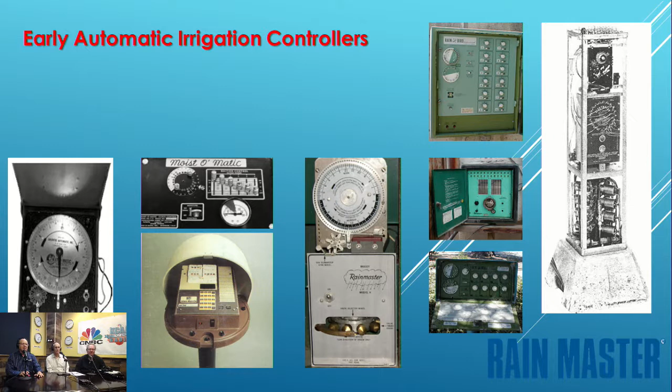Irrigation controllers have also come a long way. For those of you watching, here's a snapshot of some old irrigation controllers. Some of them I can tell you what they are and what they did, and there might be one or two that are even before my time. But most of them were, back in the day, hydraulic, electromechanical, very inefficient and difficult to program and use.

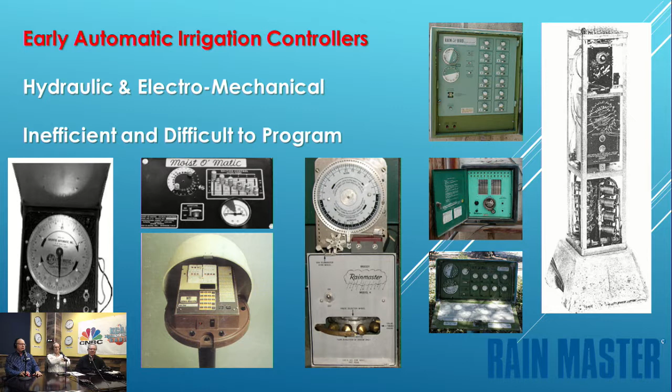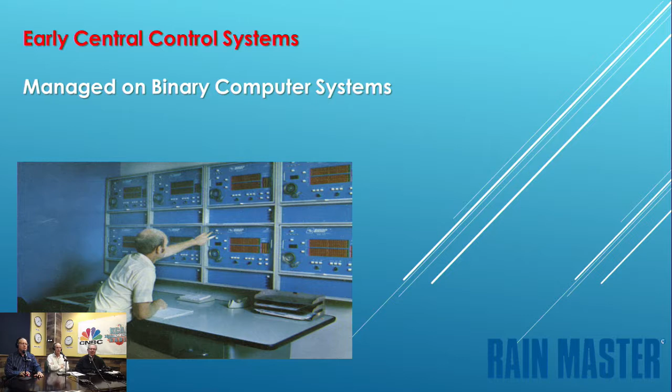Big dials. Early central control systems moved into a computer environment managed on binary computer systems, very large, difficult to manage. Looks like a Sperry Univac computer. Yeah, it's an oldie for sure.

Punch cards? I think that was managing a golf course. I couldn't tell you which one, but it managed a golf course. Do you have a circa date for that photograph? Unfortunately, I don't at the moment. Judging by the haircut and the clothes, I probably do in my notes in preparation for this, but I didn't commit that to memory.

Looks like the 70s. Now, here's another great one for you: bulky, expensive mainframe computers. So we've come a long way.

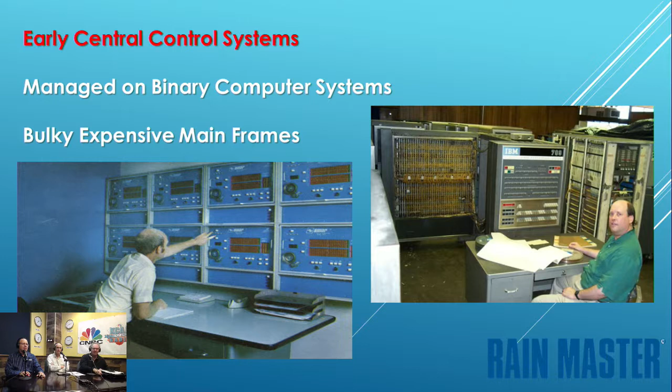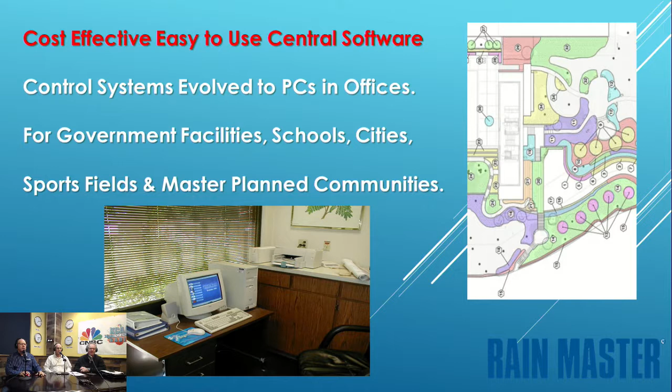As we advanced in the central control system, so did the software. Central controls evolved to be on PCs, for government facilities, school districts, and cities. PCs moved into offices and didn't look bulky and expensive like those other pictures we saw. They were used for sports fields and master planned communities, and became more widespread, readily available, and more cost-effective throughout.

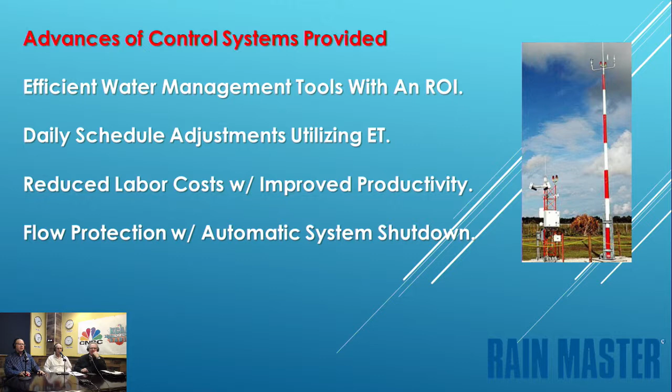Advances in the controllers themselves provided efficient water management tools with a calculable ROI, through daily schedule adjustments utilizing ET, reduced labor costs with improved productivity, flow protection and automatic system shutdown, automatic and remote shutdown for rain, freeze, and wind, along with accurate record keeping.

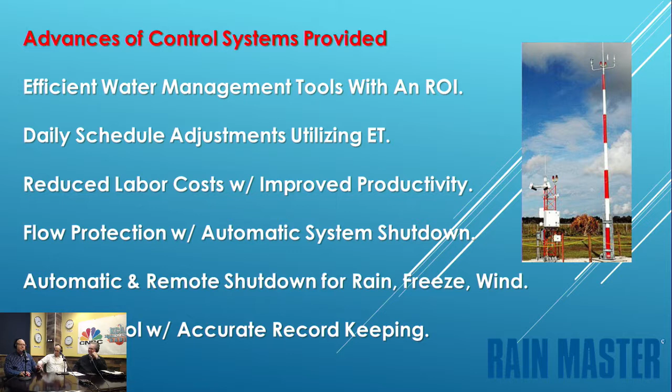These new systems provided modern graphic interfaces, which provided very powerful and total site management tools.

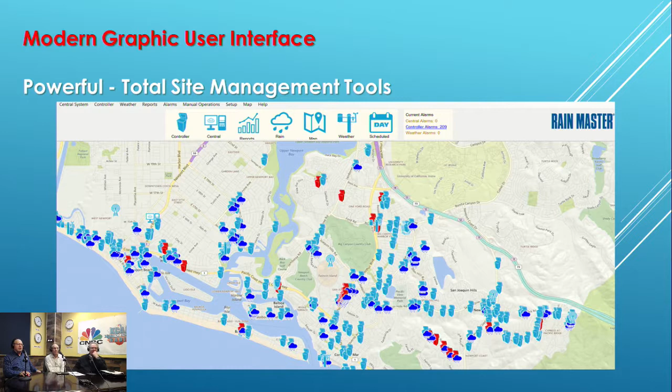I'm familiar with that part of town on that map right there. You recognize that map? Where was that from? That's Newport Harbor, yes, and Newport Back Bay, Beach. It's one of the customers very close to my heart in the city of Newport Beach.

Yep. So when this was started in the central control systems, what was the largest size? How many valves could they operate then versus what you see today? Well, that first picture we saw was a golf course, so that was probably a typical system back in the day. Now we have systems that range from 1 or 2 controllers to hundreds and hundreds of controllers.

And how many valves would they operate? As we move forward, advanced control systems can typically range between 8 to 200 zones or stations. But what provided an actual ROI for these systems to become widespread was ET-based scheduling, or weather-based scheduling.

So when we talk about ET, we talk about evapotranspiration. The evaporation and transpiration. The sum of transpiration plus evaporation from the land surface is how we calculate ET, and it's measured over a period of time, typically in inches. For those involved in daily schedule adjustments, we're looking at that ET value daily. Evaporation is the loss of water off of the surface, and transpiration is the loss of moisture through the plant material, the water that the plant used or transpired.

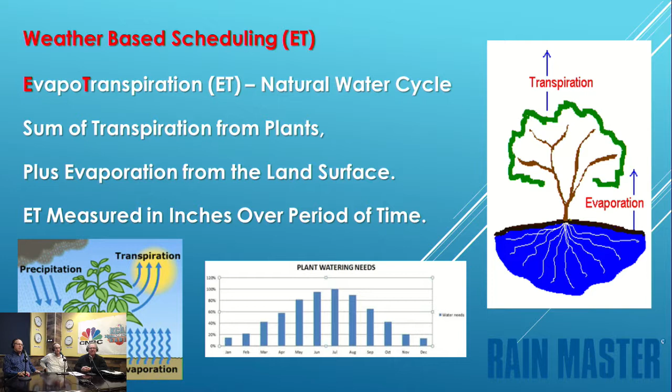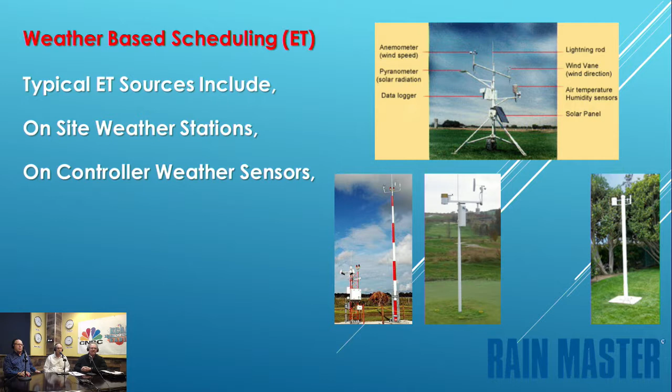So now that we have an idea of what ET is, we're going to talk about where we get that data. The typical ET sources include on-site weather stations, and there's a variety of weather stations that provide that data to us, as well as on-controller weather sensors, and internet or web weather, which is what we commonly use these days.

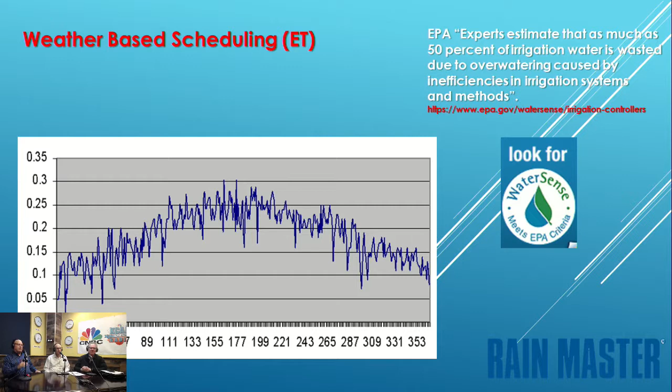So we know a little bit about what ET is and where we get it from, and I want to explain how we use it in our scheduling practices. One interesting note from the EPA's website says experts estimate that as much as 50% of irrigation water is wasted due to overwatering caused by inefficiencies in irrigation systems and methods. So what we try to do is utilize this ET information and adapt it into our scheduling models, since plant water needs change on a daily basis.

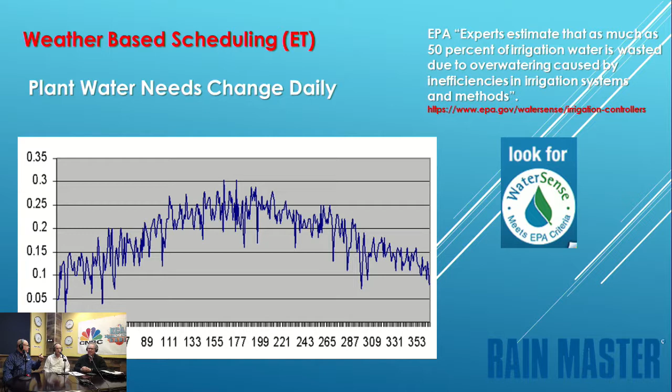As you can see in the graph, the far left represents January, in the middle around 177 is our July range, and towards the right is December, so you get a bell graph of what it looks like throughout the year. As an example, on the left side where it says 0.25, that indicates about a quarter of an inch of ET per day.

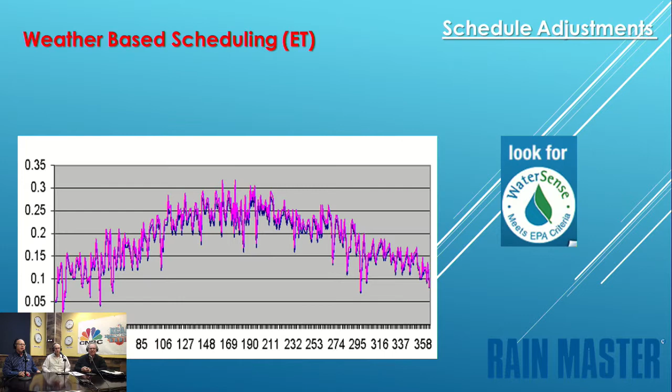What we really want to do is have these daily ET program adjustments match the ET. In this example, you see the irrigation schedule perfectly aligning with the ET values throughout the year, and that's truly the goal.

Now, you made mention of the description of what ET is, but I look at it like the ET information is the engine of a big race car. And the irrigation system, if you have 10 pounds of pressure in your tires, you're not going to get the mileage you think you're going to get. So that's only half the battle, having the right irrigation schedule and equipment, but also the irrigation components out in the field have to be up to par as well. The distribution system has a lot to play into that equation. As the EPA slide talked about, inefficiencies in systems and scheduling definitely work hand in hand.

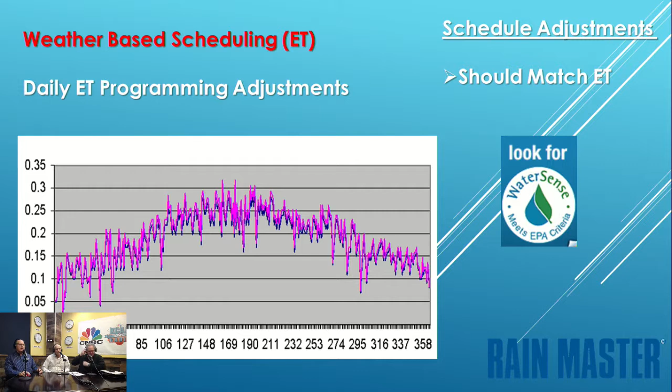So now that we know what ET is, what the sources are for it, and what our goal is with it, I'm going to give you a basic overview of how we integrate that into our irrigation schedules. In this example, a manager defines a zip code location of the system or controllers within that system, and a reference ET value. The reference ET value is typically the warm season daily average, the warmest month's daily average.

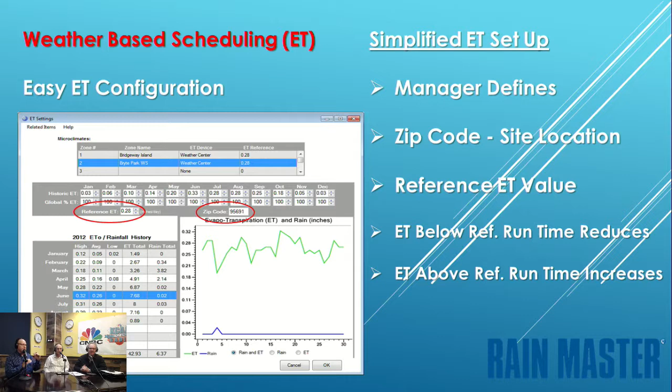To keep it simple, ET below our reference is going to reduce our run times, and ET above our reference is going to increase our run times, if that makes sense to you guys. You with me so far?

So now we're going to look at how that plays into our daily programming adjustments.

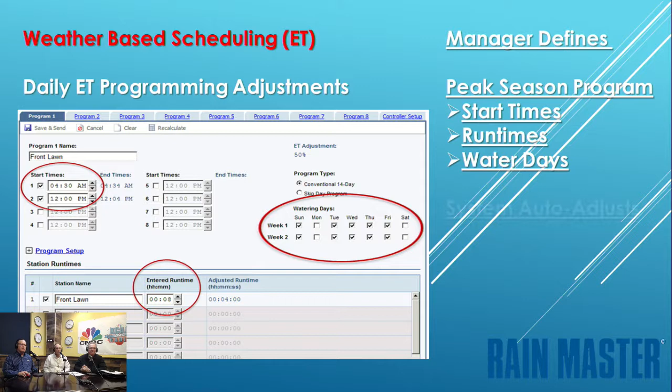In this case, a manager defines a peak season program by defining a start time, in this case 2 start times, the station run times, the water days for the schedule, and then the system automatically adjusts using ET, the ET percentage, which automatically adjusts the run times.

If you follow me there, we're at 50% of our adjustment, which means our ET that was delivered was half of our reference value. So you can see we have an 8-minute run time, and it's been reduced to 4 minutes.

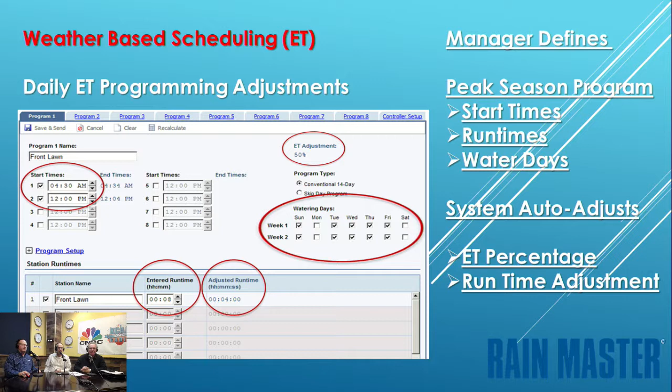In this scenario, we're going to show daily ET, but we're going to kick it up a little bit and maybe become even more effective by introducing a cycle and soak feature to our programming.

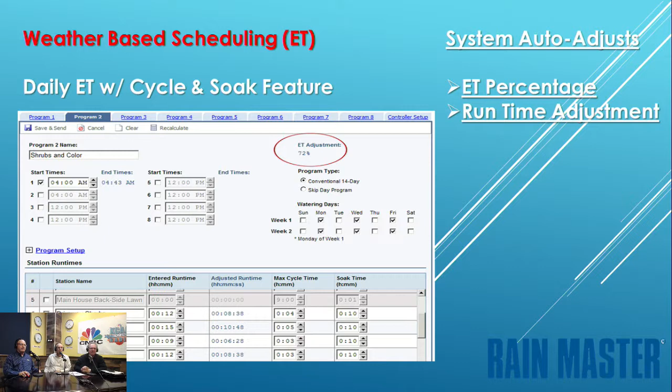So we already know that the system automatically adjusts the ET, right? We saw that a moment ago. And we know that the system automatically adjusts the station runtime. In this scenario, the manager is going to define a single start time rather than 2 start times in our last example, and the manager is going to define a maximum cycle time.

So in this scenario, I think we're much more effective. Theoretically, in the last scenario, the manager reduced the run times for each zone by 50% and provided 2 start times in order to reduce runoff and attempt to be more effective at putting the water in the root zone.

In this scenario, we give it 1 start time, yet we can fine-tune each specific zone to a maximum runtime. So our goal here is to reduce the runoff, as well as if we have very porous soils, that longer runtime may go beyond the root zone depth into an area of the soil where the plant can't absorb it. So in this scenario, we can provide for a maximum cycle time as well as a soak time if it needs it.

So just for the listeners that may not be familiar with the term cycle and soak, can you do a little one-minute definition of what that purpose is?

Yeah, absolutely. So with the maximum cycle time, that's basically the number of minutes you can irrigate before runoff occurs or ponding, or the saturation point, or the percolation of the soil is such that the water goes below the root zone depth and the plants can't absorb it.

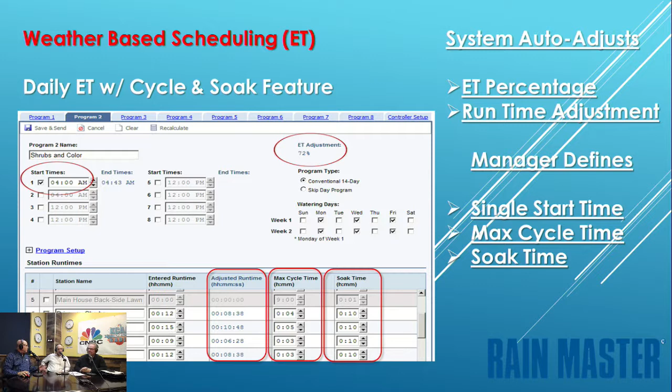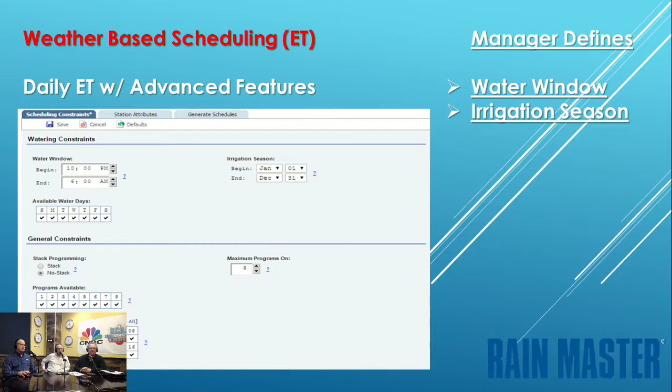It did, thanks. Good. In this next slide, our adventure is going to take us into daily ET using some advanced features. In this scenario, the manager is going to define some scheduling constraints, in other words, a water window and perhaps an irrigation season. Here in Southern California, we're kind of open season all year long, but not necessarily across the nation.

The manager could also define allowable water days, in other words, days that the system can come on, as well as the maximum number of stations or programs that can run simultaneously, as well as available programs and stations that we want the system to be able to use.

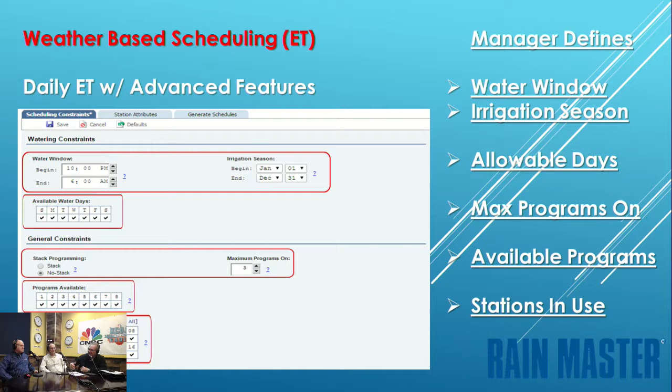Now, in case of a water window, say the city water agency says you can only water between 10 o'clock at night and 6 o'clock in the morning, and say you're doing a college campus, let's take a huge place, and you have X amount of valves to run. But if you look at the time allotted and your ET value, you may not have enough time to run through the whole system.

Can you run on most of these controllers? Can you run, I know the answer, but I want you to say it, can you run multiple valves at the same time? Absolutely. So based on the electrical constraint available from the controller, we can irrigate multiple programs at the same time.

As our journey progresses, I'm going to show you how the controller can intelligently define which stations can be turned on simultaneously. In this scenario, we're looking at daily ET with some advanced scheduling. We're going through scenarios where each slide builds and introduces more definition into what we can do.

I told you it's going to be a nice friendly journey, about 500 feet, treetop flying. Did you bring any snacks? We may need some nuts before this is over. We got 3 nuts sitting here, so we may have plenty then.

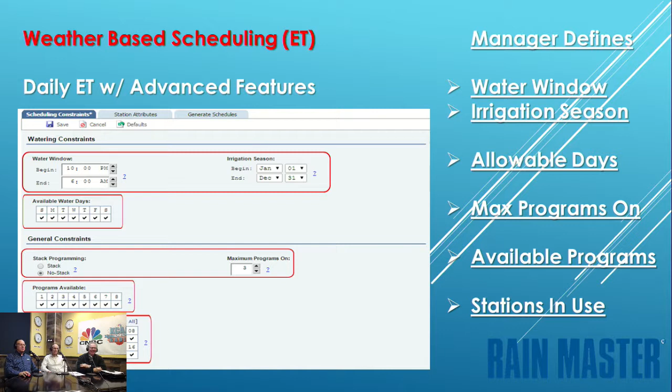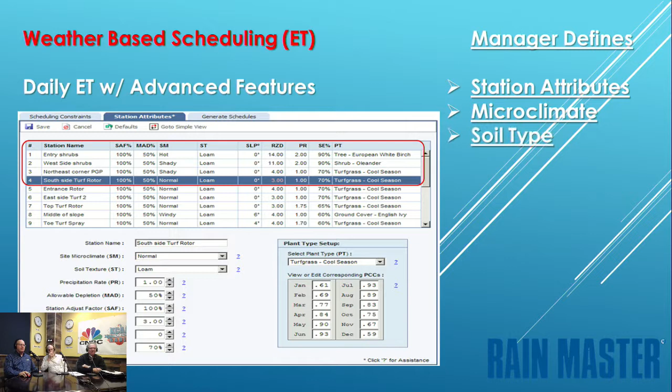So those are what we call scheduling constraints. In this next build, the manager is going to define station attributes, like water audit data for each station, such as microclimate, soil type, precipitation rates, maximum allowable depletion, station adjustment percentages, root zone depths, slope factors, and station efficiency or distribution uniformity. The end user can also define the plant material and its crop coefficients for each month throughout the year.

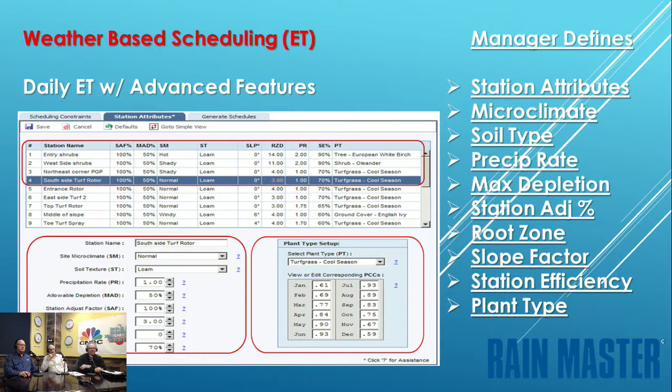So in that scenario, the schedule would be built using that engine and that criteria to define and maximize the schedule for us utilizing daily ET.

Now, a moment ago you were segueing me into how we work with large systems, with a large number of stations and a short water window to get them done. Quite often on larger campuses or facilities where the general population is there early in the morning, maybe a PE field or public area, we want to irrigate as many stations as possible. The general term for this is flow managers, though I like to refer to it as advanced irrigation management, or AIM.

So a flow manager really means the optimization of the water source. This next part is going to talk about how that works, and we might go a little steeper on our altitude for a minute, but I'll take care of you.

You know, there are some areas where it's snowy, and it's like 38 to 40 degrees in the morning, and it doesn't warm up to 50 or 60 till 10 or 11. So with a smart irrigation system, you can set limits for the temperature you want this to happen, which is important because you shouldn't water when it's almost freezing out. I agree, that could be another important factor.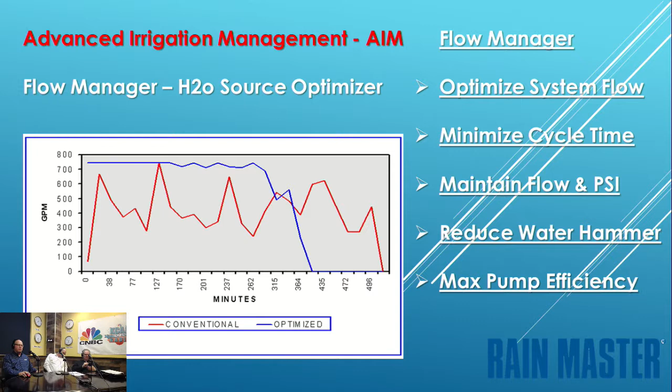But in this scenario, we're going to talk about flow managers, in other words optimizing the water source we have. The optimization minimizes your cycle time, so we're completing irrigation earlier than we would have. We're maintaining flow and pressure throughout the irrigation event, potentially reducing water hammer in the system, and maximizing pump efficiency, should we have one. The overall effect is we reduce runtime and minimize our cycle.

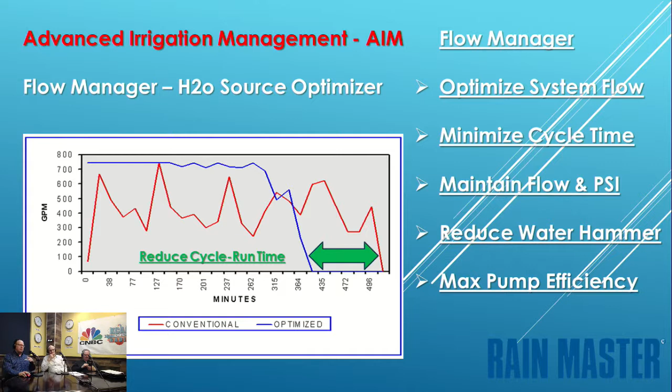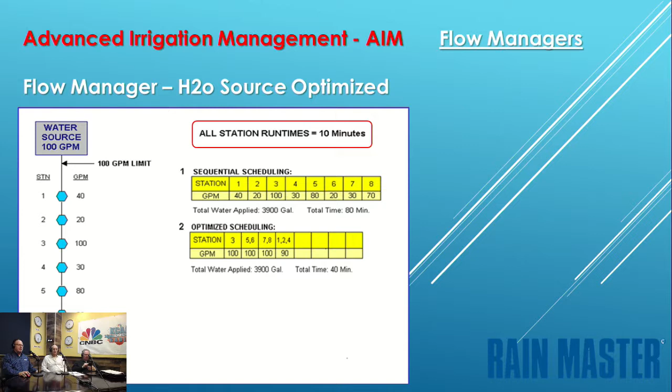What we want to do here is optimize this water source. At the top of the slide we have 100 gallons as our source, so a 100 GPM limit. Instead of starting with stations 1 and 2, the system realizes station 3 is 100 gallons a minute, so it would irrigate that station first. The next thing it intelligently realizes is that stations 5 and 6 total 100 gallons a minute, so it would irrigate those two next.

And stations 7 and 8 also total 100 gallons a minute, so they would be in the next group. And then it says I can finish off with stations 1, 2, and 4.

They only total 90, but I can group those 3 together and not exceed my source. So when we've maximized or optimized this water source, we've reduced the cycle runtime, we've put the stations into 4 groups like Rob mentioned, and they've still ran their same number of minutes. They've still put down the same amount of water. We've just got the work done in half the time, so we've improved our efficiency.

In this next scenario, we're gonna optimize the same water source, only we're gonna say that about halfway down our main line, we have 2 sources. So 100 gallons a minute at the top of our source, yet perhaps there's a pipe reduction. Maybe we have a smaller size main line halfway down the line, and maybe it can provide us with 80 gallons a minute. So now the system is going to maximize our program without going over what the systems or the sources can provide, without exceeding them.

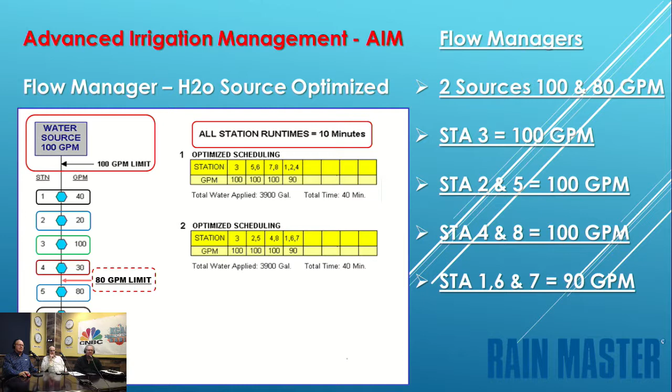And to finish off the sequence, it would grab stations 1, 6, and 7, totaling 90 gallons a minute. Again, not exceeding either of the 2 water sources, putting them into multiple groups, 10 minutes each, with a 40-minute runtime. So again, we've maximized the 2 sources without exceeding the supply of either. Make sense? Any questions? You good to go?

Okay, so an interesting question that may come up with this topic is that, well, we don't irrigate 10 minutes on every zone. That's kind of ridiculous. Every station has a different number of runtime. The systems are intelligently managing that, and as soon as a station runs out or exceeds or finishes its runtime...

...the system intelligently grabs the next best valve and puts that in its place. As the next valve finishes, it's constantly relieving valves from their runtime and putting in new stations to maximize that source. And you can also set, once the valve is turned off, you can set the time before the next one starts, so you don't automatically run a second group with this. Is that correct? Absolutely, it's very customizable.

Right, so in this scenario, I didn't want to get too over the top, if you will. But I did want to explain that we're only at 500 foot level. We're at about 500 feet, we might be dipping a little lower at the moment. But to couple back to your comment in regards to how do we finish our irrigation on large sites, we want to irrigate multiple programs at the same time.

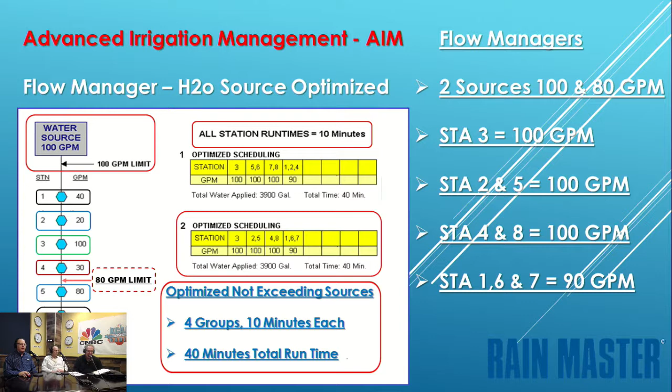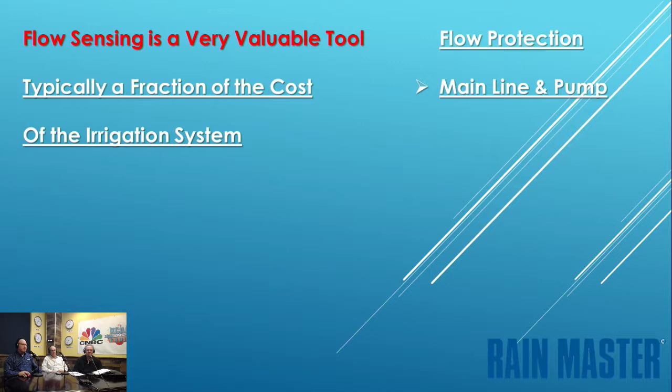So our next journey, if you will, is going to bring us into flow sensing, and I think it's an extremely valuable tool. Surprisingly, it's typically a fraction of the cost of the total irrigation system. So when we discuss flow protection, we talk about protecting main lines and pumps, shutting down in the event of a catastrophic event. Obviously, this is on the slide.

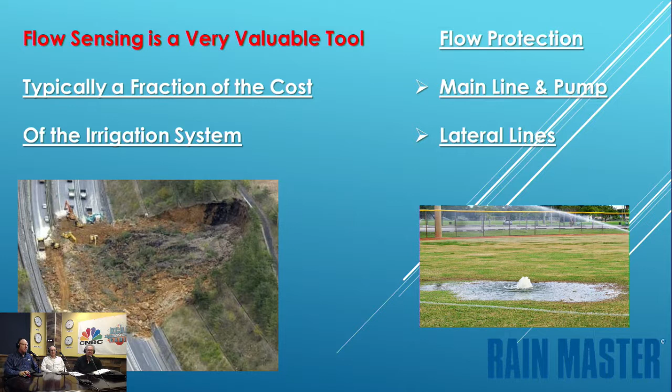Lateral lines, of course, it's more day to day. But in either case, I tell people that are the best schedulers, you can have the best scheduling, you can use advanced ET, you can use flow managers. But if you have one mainline break that goes undetected, literally you could have lost your entire year's worth of savings and hard work down the drain, not to mention the cost of repair associated with breaks. So I look at flow protection as well as a protection of our savings, right? It's like an insurance policy as well.

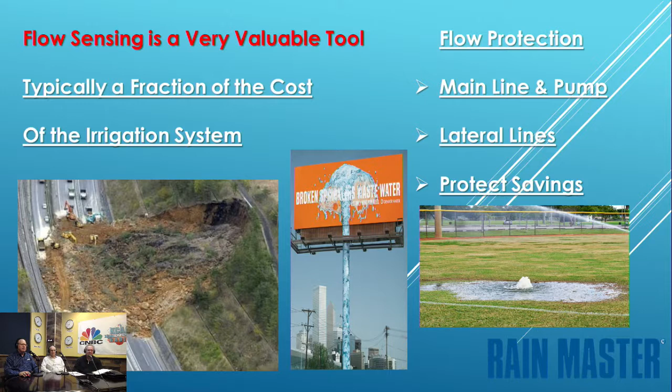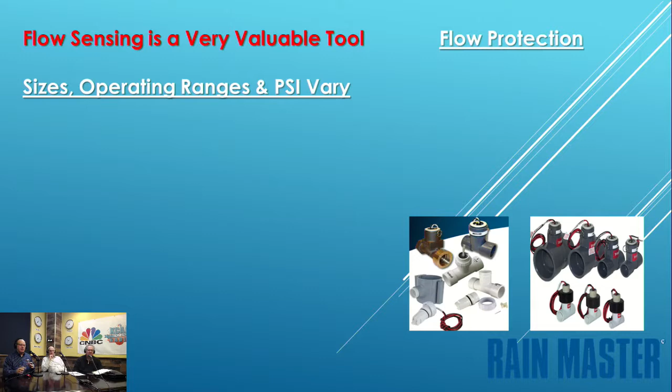When we talk about flow sensors, there's a large variety of flow sensors that do different things. There's a lot of types. Some of the most commonly used are displayed on our screen. They range in connection sizes, flow ranges, and the pressures they can accommodate.

The reason these items are important is there's a common disconnect: if somebody has a 2-inch main line, they think they need a 2-inch flow sensor, and that's simply not always the case. It may be, but quite often you have to look at these charts to determine the correct sensor for your system.

Maybe one sensor doesn't incorporate your entire system. Part of your system might be drip or low flow, and some might be higher flow. You might need more than one flow sensor.

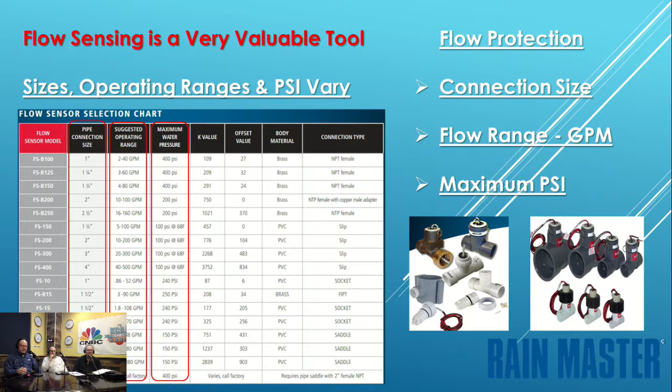So in this next part, I'm going to talk about how we would typically set up multiple flow sensors on a site. In this scenario, the end user or manager defines the sensor types he has. Here we're going to use a 2-inch sensor and a 1-inch sensor to accommodate our flow range and pressure of the system.

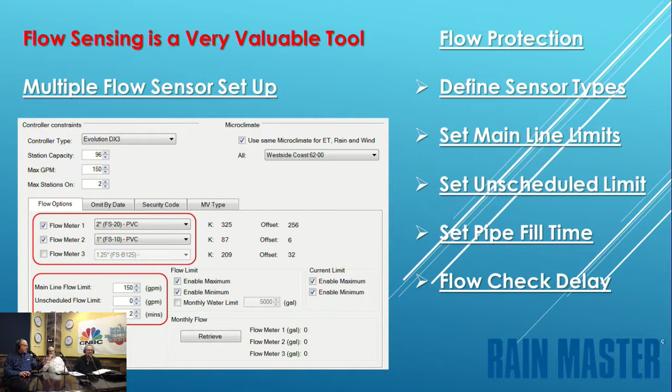Here we can set the mainline limits, the unscheduled flow limits, as well as set a pipe fill time, or what some people call a flow check delay. That's the behind-the-scenes setup for the flow sensing feature.

As we progress, we want to know how to set up individual stations. Most systems have an auto-learn feature. The system or controller will turn on each zone for a couple of minutes and memorize or learn that GPM value for that station, doing this throughout the entire system.

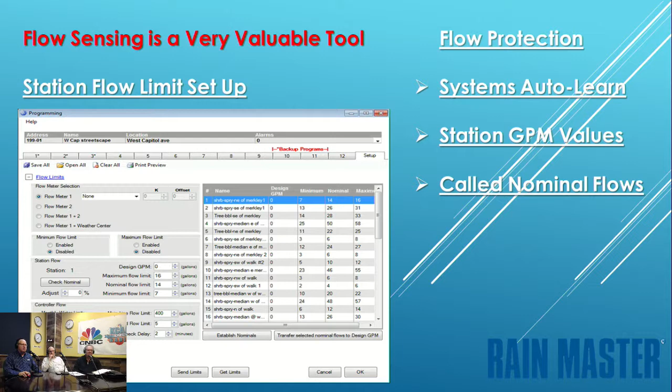It learns them in gallons per minute values, and we call those nominal flows. So each station has its own nominal flow, and you can visualize it here. The high and low flow limits for each zone are basically set as a percentage of the nominal, so the end user can set a percentage for high and low flow for each specific zone.

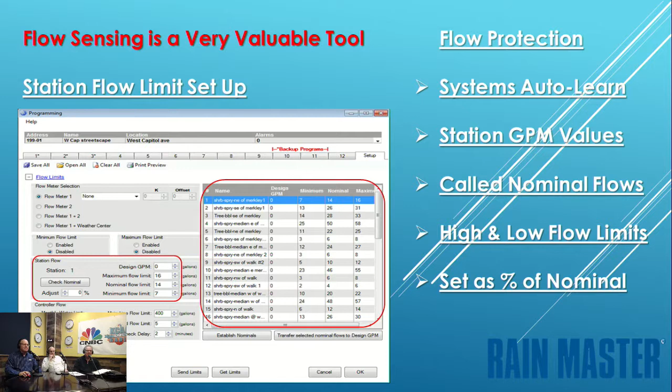As we're cruising through our journey here, we're moving into more modern times, and we're all familiar with what we're about to talk about. A unique distinction worth mentioning is that Rain Master introduced the first Internet Central Control System on June 9th, 2003.

You might wonder why that's such a specific date. To me it's special because I was on the team that helped introduce this at Rain Master. I think anytime you successfully launch the first of something in the world, it's worth mentioning. It's an exclamation point in all our careers who were there at the time. Jim Szyminski was our leader back in the day.

John Tarosian was part of the team, Greg Fast was part of the team, Bill Smiley was there, Carol Wood was there, and a few other people behind the scenes as well. But all of us were there, and we all participated in the development and release of a successful world's first internet system. So it's something I'm proud of, and proud to carry on the heritage here.

We called it iCentral, and we still do. As we introduced this internet control, it allowed connection to your system using a smart device—cell phones, tablets, cloud connection, managed from the field. No PCs or software to report to. It was very easy to use, reliable, and very high powered.

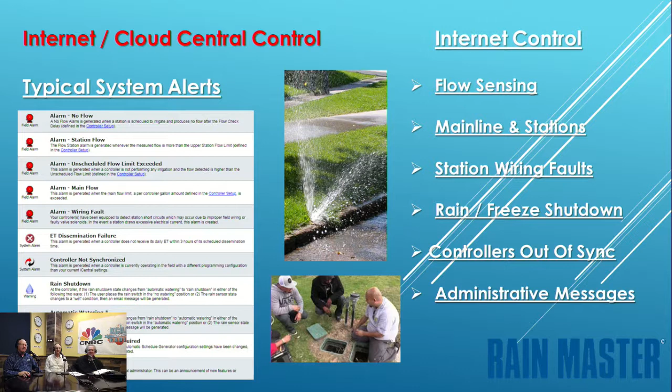So now we have a way of immediately communicating to every user out in the field right through the website instantaneously down to their device.

So remote access to information became available, and I think this is another huge feature of what we provided with the internet control systems. We provided instant in-field access to information, communication information, irrigation schedules. A huge one is water usage reports. With the integration of flow sensing and internet control, we immediately have information at our fingertips, controller alerts, reports, daily ET information, it's all there. And that's not only for the user, it's also for the companies who manufacture this type of equipment. They can actually get online and see what the user is doing as well. Absolutely, so that makes it really nice for customer support for everybody.

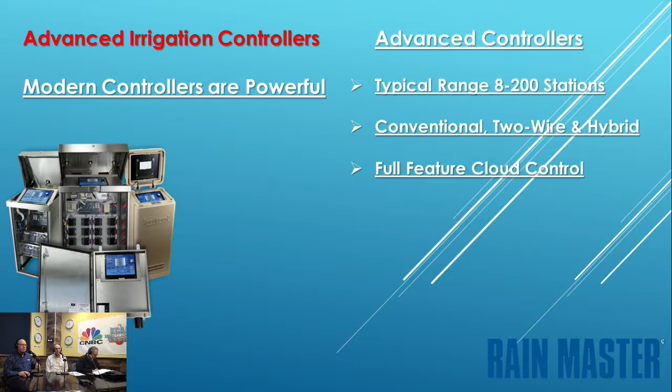As we move forward through our journey, controllers and systems are advancing with technology. To couple back into your question earlier, advanced controllers typically range between 8 and 200 stations, conventional, 2-wire, and hybrid, meaning they can provide for conventional and 2-wire irrigation in one controller, full feature cloud control, advanced ET scheduling, multiple sensors and master valves, as well as AIM flow management.

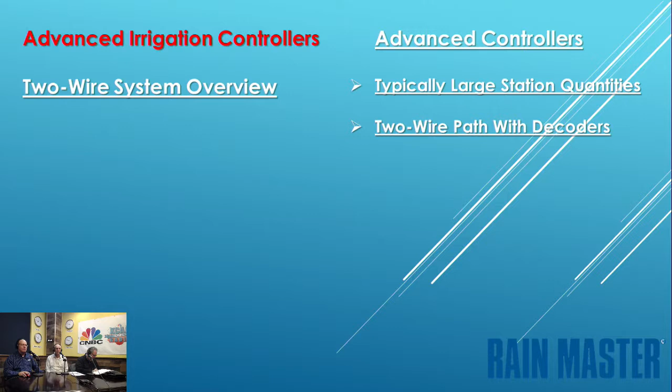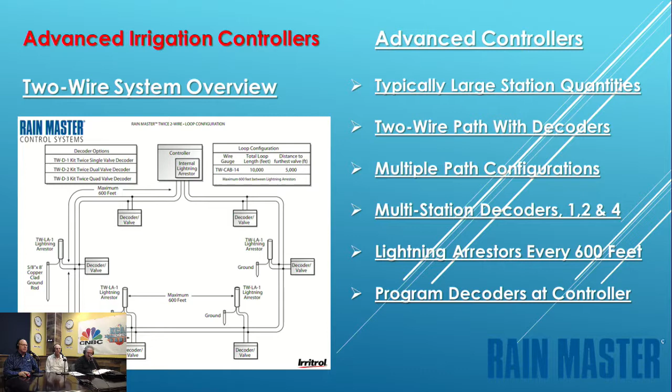In regards to 2-wire, I'd like to touch on that briefly. Typically for larger station quantity projects, there's a 2-wire path with decoders, and along that path there are multiple path configurations. The one shown here is just a loop configuration, with multiple station decoders along that loop connected to the solenoid valves, and lightning arresters along the 2-wire path. Typically the decoders can be programmed at the controller itself, making it easier for the end user or the installation contractor.

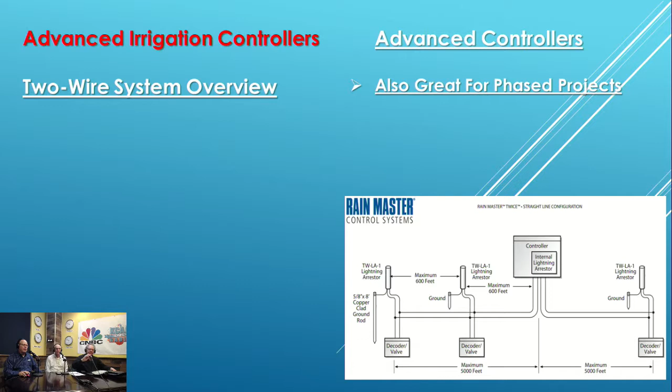One of the other great things that 2-wire controllers are very good for is a phased project. We might have a very simple 2-wire path here, and as we move forward into the next phase of our project, it's very easy to add on, add multiple controllers, add more stations. Easily scalable, great for phased work.

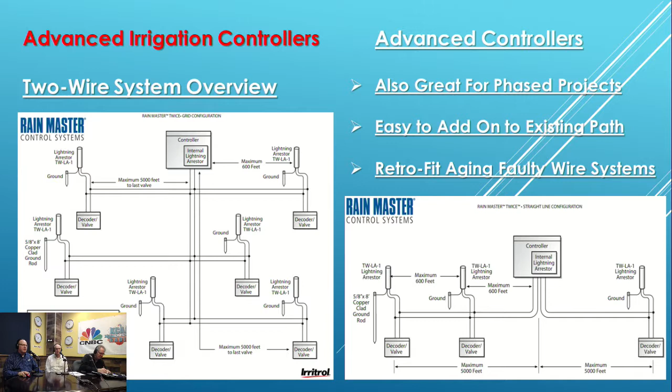It's also great for retrofitting older properties that have aging, faulty wire systems. It's very easy to just run a piece of new 2-wire right down the mainline path, connect into the existing valves, and modernize your system.

Now we're going to go from our 500-foot elevation, if you don't mind, and go subterranean, dip down again, below grade for just a minute.

I think this is an important feature because grounding is very, very important to our advanced controllers these days, and it's quite often overlooked, in my opinion. One of the primary questions when we're talking about grounding is where do we place the ground? How do we know where to put it?

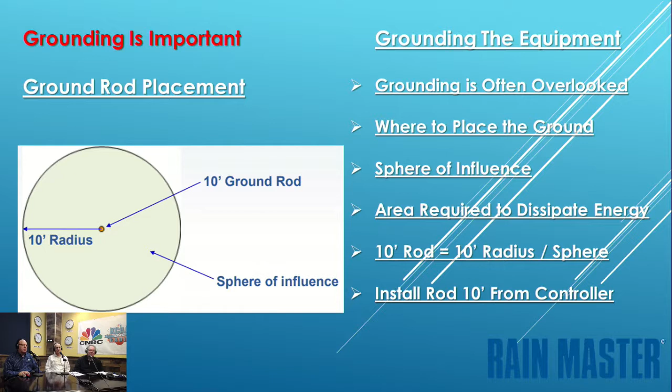We talk about the sphere of influence when discussing grounding. That means the area required to dissipate the energy. In the graphic provided, we have a 10-foot ground rod as an example, and the sphere of influence is 10 feet. So a quick rule of thumb: if you have a 10-foot rod, your sphere of influence is 10 feet. If you had an 8-foot ground rod, your sphere of influence would be 8 feet. Pretty simple stuff. So in this scenario, with a 10-foot rod, we install it 10 feet from the controller.

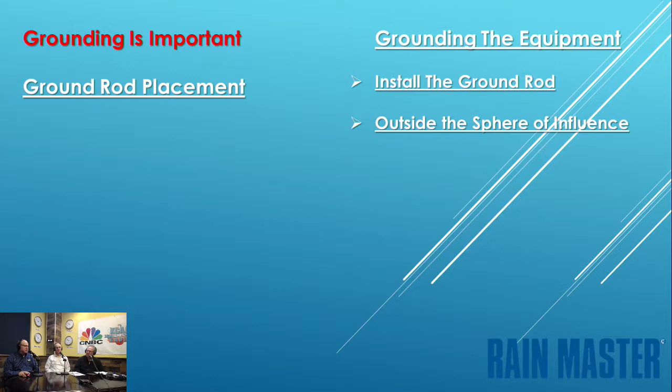Install the ground rod outside the sphere of influence. Many controllers, especially here in Southern California, have the ground rod installed in the concrete base of the enclosure. What we're asking people to do is install the ground rod outside the sphere of influence so it has a safe area to dissipate the energy without affecting the components within the control box.

Making a solid connection is the next important thing to providing the proper ground, not only getting it out of the sphere of influence, but making a nice and tight connection at the rod itself.

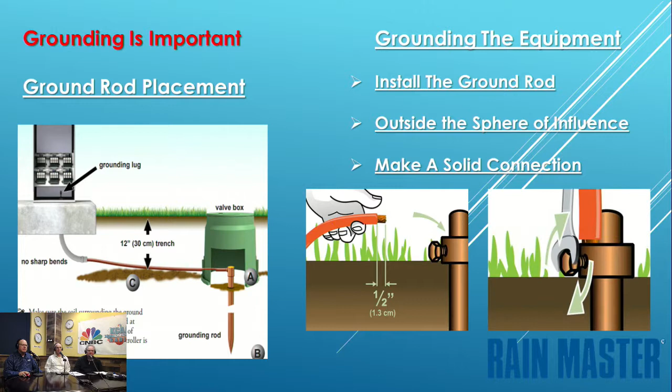Can you wrap that with silicone tape to prevent any moisture, because you're going to get corrosion from copper and things of that sort? I do that for my ham radio equipment, I put it on all my antennas, I have this wrapping material. It's probably a good idea, but I don't see it mentioned in any of the articles or documentation I researched. I'm not necessarily sure if it might be a little overkill, but it certainly couldn't hurt in some areas. Here in Southern California we don't have a lot of lightning. But if you get into a lightning-prone area, I think overkill is not a bad idea. And it protects against moisture too.

Well, with the ground rod itself, or the ground plate, we want it to be in a wet area. So depending on site conditions, you may not be able to pound an 8-foot rod into the soil — there might be a rock down there.

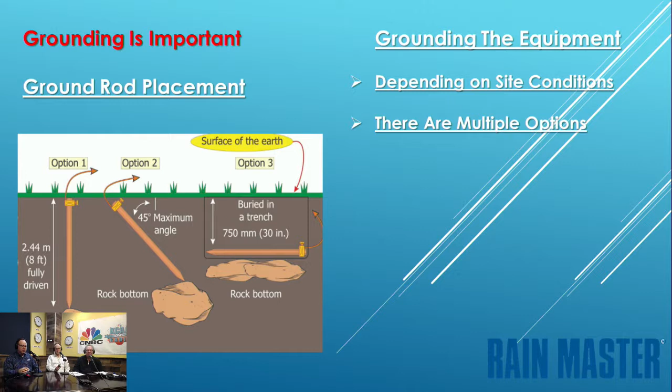What we never want to see happen is somebody cutting the ground rod down because they hit an obstacle. If you hit an obstacle and can't get the ground rod in, try again — you have to find a better way to do it.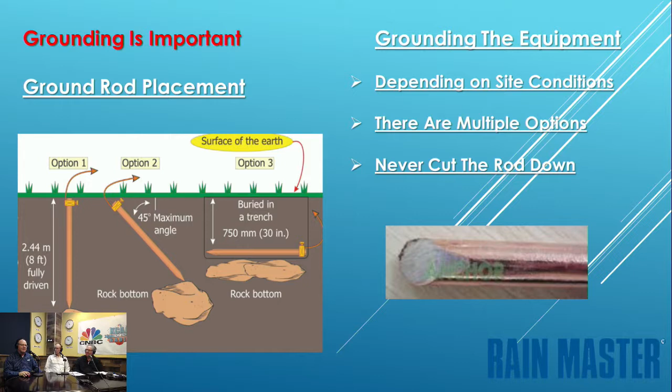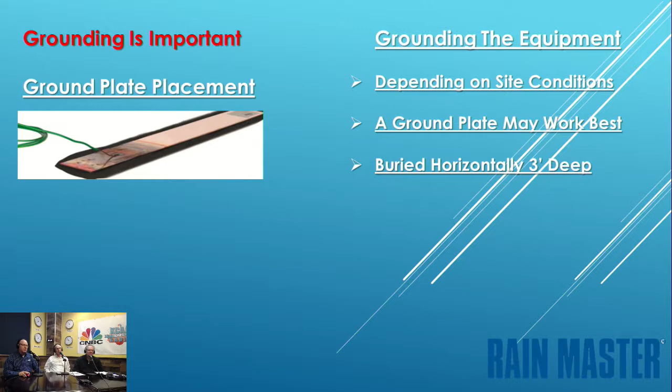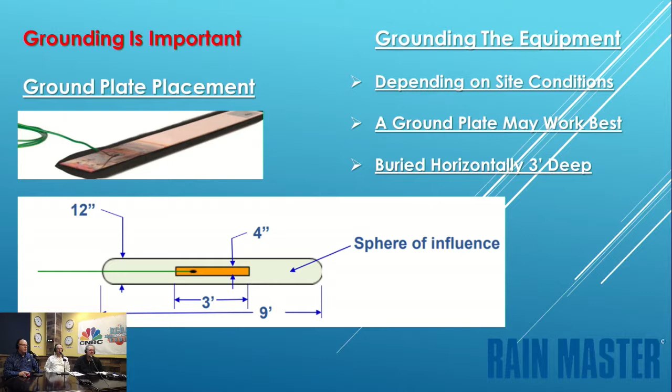Depending on the site conditions, a ground plate may work best. In this case, we have a horizontal ground plate, typically buried horizontally 3 feet deep. This shows the sphere of influence, so you're not trying to pound something 8 or 10 feet down into the ground. If you don't know what's in the ground, you might be worried about utility lines, so a ground plate could be a better solution.

It depends on the neighborhood you put this in. You may find some bodies, like in Chicago. It very well could depend.

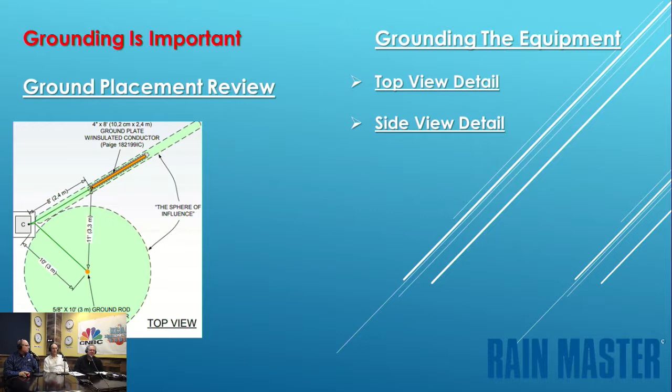So in review, here's a top view detail. It shows the sphere of influence, there's a 10-foot rod, and the sphere of influence is 10 feet, so the rod is placed 10 feet away from the control box. The detail on top is a ground plate, a 4-inch plate, an 8-foot plate. That 8-foot plate is 8 feet away from the controller. And here's a side view detail of that same scenario.

I always mention to an installation contractor or firm to refer to the manufacturer spec, not only for the controller, but also for the ground equipment you're using, because they may have some tricks or tips for you, but you certainly don't want to void the warranty of your controller by not grounding it correctly.

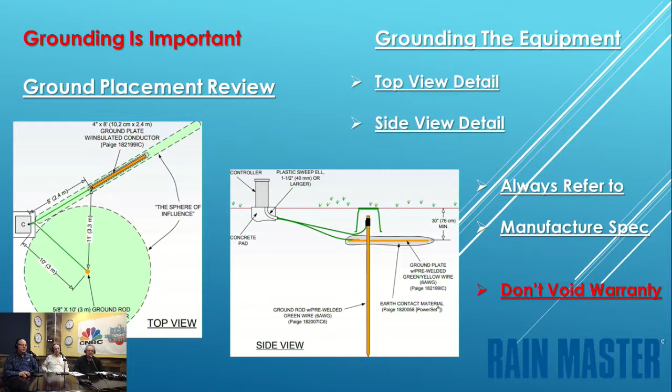Very important, and I think it's very overlooked, so that's why I wanted to spend 3 minutes or so on this. One of the things that typically doesn't take place, or rarely does, is testing the grounding during or after installation to make sure it's even grounded correctly.

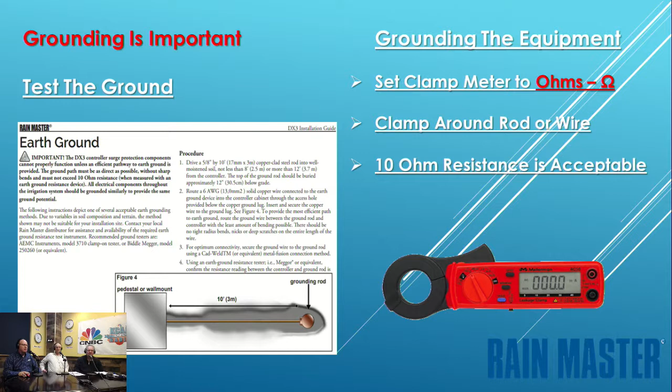It's very simple to use and do. Set a clamp meter to ohms, put that clamp around the rod or the wire itself, and what we're looking for is 10 ohms of resistance or less. That can vary, but in our documentation we say we're looking for 10 ohms of resistance or less. The lower the reading, the better.

So there truly is no limit, and we really don't know what or where the next world's first is going to come from. It's out there somewhere. We don't necessarily know where, but it may not be on this world, right? That could be the world's next. Mars. It very well could be.